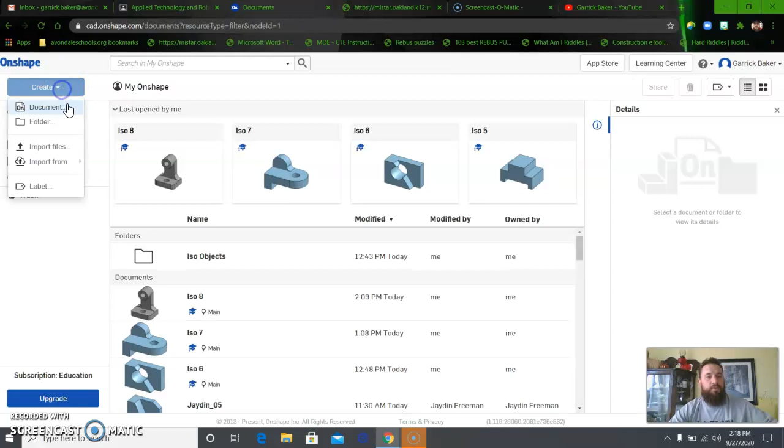So go by create document, and this is Iso 9. I'm going to create a sketch, and I'm going to do my front plane this time. I'm going to draw a line.

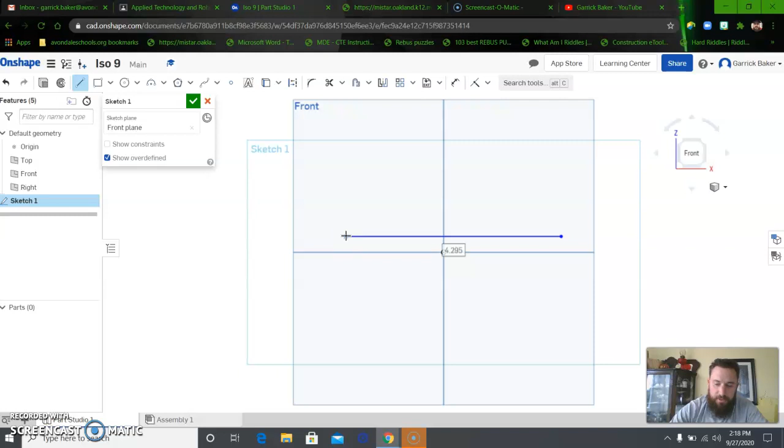I'm going to click over here, go to my left, total length of 4. The height, I'm going to click up and then make that height 3. And this is where I'm going to start making my slant.

So for my line for my slant, I'm going to count it over. It goes 1, 2, goes over 3 inches. I'm going to click over here, click 3, and I'm going to end my line right there.

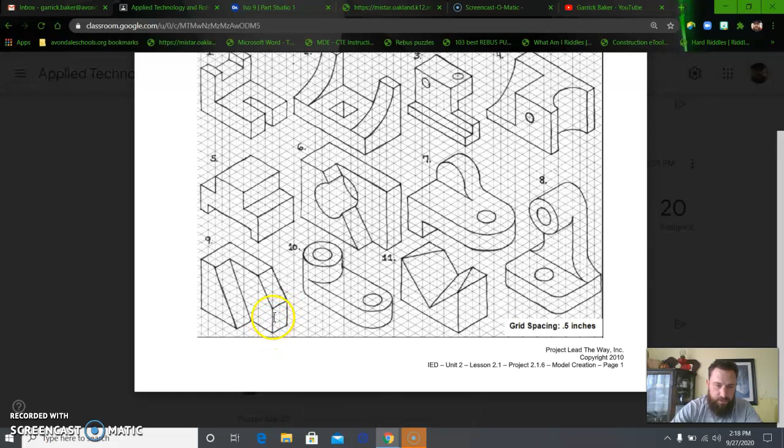And I'm going to go down and do this measurement right here, which goes up a total of 1.5 inches. So I'm going to click on line, click down here, click up, type in 1.5, and enter. Now I can just connect it right to that slant without having to measure any of the angles.

We always try to find the easiest way of doing something without having to do too many measurements, because the quicker you can make the part, the better it can be.

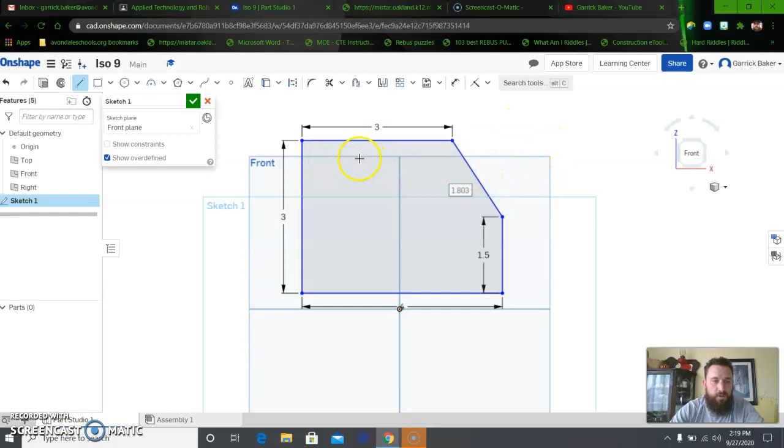So now we're going to extrude, and this guy is going to be extruded 1 inch. It's already defaulted to 1. Click check. Now we've got to do this part right here, which we're going to do in the same method.

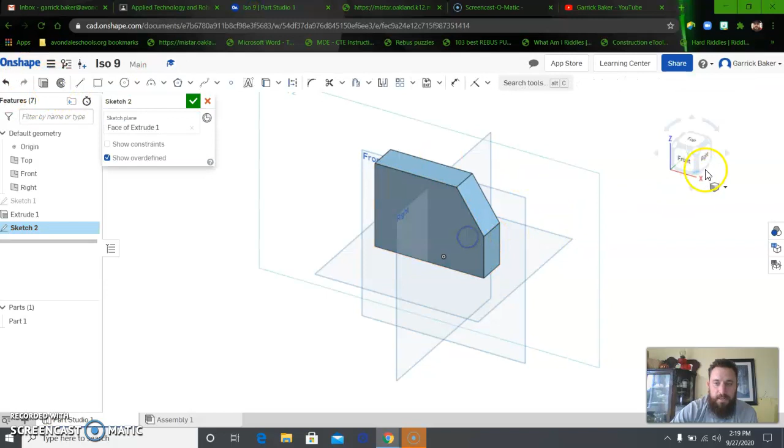I'm going to create a sketch on the front of this object, and I'm going to use my line tool, and go do the line all the way up and it goes over 1. So create a line, click in this corner, go all the way up, click over, type in 1, enter.

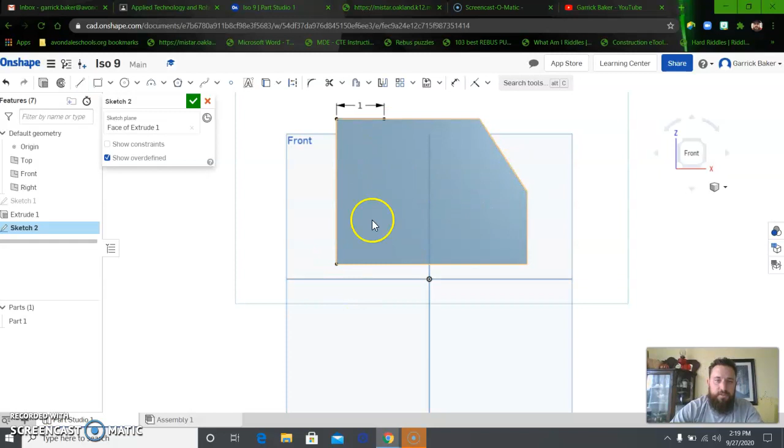So you can see that's where the end is. I'm going to hit escape to get off my line tool, and then go from here over, which is a total of 1, 2, 3 inches. So click back on my line, start in this bottom left corner, go directly to my right, click and type in 3. Then this just connects to that end point that we've already made, and so we have our slant already done.

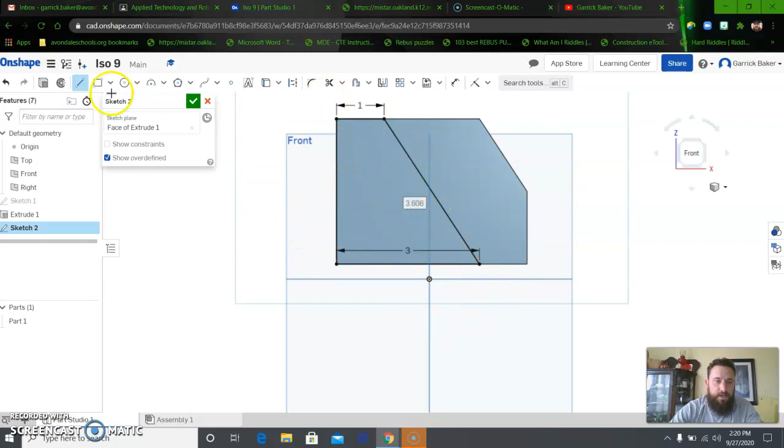So now I can hit extrude. It's going to select that face automatically, total of 1 inch, and click the check, and that is it for number 9.